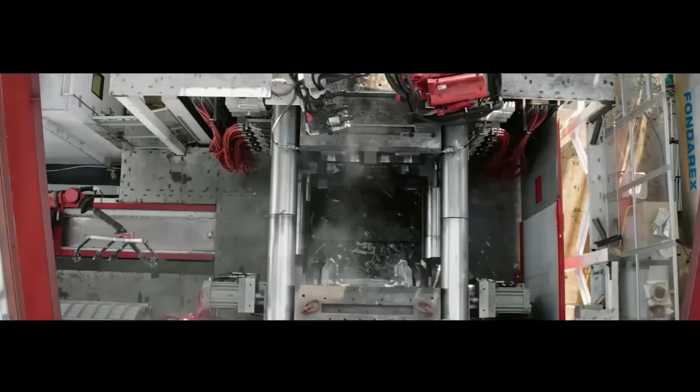This doesn't seem battery related, but in a way it is. There's 3 ways that I see Tesla could increase the output from Fremont. The first is to increase the throughput. The second is to make better use of the floor space through things like the Gigacasting machines. And the third, which is where this ties into batteries, is they could use modular Z construction and build up. The reason why it's battery related is because we've already seen this in the Kato Road facility. Now, I see modular Z construction as less likely, but I thought I would bring it up because it might be of interest to people.

If you'd like to know more about that and Agile at Tesla, there's a great video on this by a guy named Joe Justice, so look that up if you get some time.

Let's move on to Q&A. The first question that's battery related is, when will Cybertruck production begin and at what rate will the ramp happen? And the response was: this year has been a constant struggle with parts supply. If we had 5 extra products, we would not change our vehicle output at all because we're just basically limited by multiple supply chain shortages, not just chips. It really wouldn't matter if we had the Semi or Cybertruck or anything, we wouldn't be able to make it, and the Semi in particular needs a lot of cells. So it needs a lot of cells, a lot of chips.

This year I've received a lot of questions and concerns from people that the 4680 ramp was causing delays in vehicle ramps and the launches of new products. Now, I've consistently said that I don't think that's the case, that the 4680 in some instances might have something to do with it, but it's probably due to other factors and the situation is more complex. And that's basically what Elon is saying here.

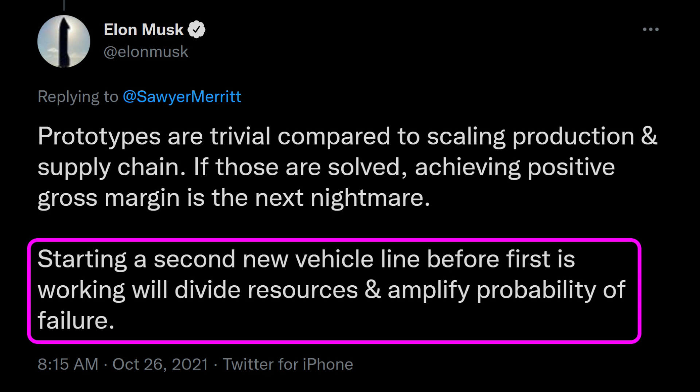I think Tesla's plan was to ramp the Model Y from July to December of this year and then taper the resources over to the Cybertruck as that ramped. But because they don't have enough chips for the Model Y, they've had to delay that. So it makes sense now that the Model Y would ramp from January to June of 2022, and after that they start ramping the Cybertruck and they hit volume production in 2023.

The way things are looking, mid-2022, there should be plenty of chips for all those vehicles. And the 4680 should be ramping in Austin and Berlin in the first half of 2022, on into the second half.

With regards to the Roadster and the Semi, I think there's a much higher likelihood that that's due to delays with the 4680 ramp, because the Semi is so cell hungry, and the Roadster, it's cell hungry as well, and it doesn't require many chips. So to me, it seems like the reason why those are delayed is due to the 4680 ramp issues.

Now, Elon had one more response to the question about when the Cybertruck would begin production, and that was, we should be through our severe supply chain shortages in 2022. I'm optimistic that'll be the case. We will see. I think it's worth emphasizing what's happening here and what Elon's saying.

First, even though a moment ago I just said that the 4680 would most likely cause the delays with Roadster and the Semi, it's not necessarily the case. They still could be having supply chain shortages in other areas.

I'll expand on this a little bit. Vehicles last 10 to 20 years, let's say 15 years on average. Meanwhile, EV manufacturing is growing on an exponential curve. So if we look back 10 to 15 years, if we're recycling the batteries from 10 years ago, from the production from 10 to 15 years ago, then we're only meeting about 10% of our needs for raw materials.

I do totally agree with JB Straubel that we can mine drawers around the country where people have leftover electronics, and we can use that lithium for vehicles. But it's only going to satisfy about, at most, 10% of the demand. So it's going to be probably 2030, 2035 before recycling starts making a significant dent in the raw material needs and drives down prices.

Elon goes on to say, lithium is extremely plentiful. It's one of the most plentiful things on Earth. It's not rare at all. It's hard to avoid lithium. I totally agree with this. People often bring this up to me that, hey, we're going to run out of lithium. And the answer to that specific question is no, of course we're not going to run out of lithium.

But where I think Elon missed an opportunity here is to clarify what the bottleneck for lithium production is. The bottleneck is permitting mines and building all the manufacturing infrastructure around taking that abundant lithium material and turning it into a finished product for vehicles. I think he missed an opportunity to provide a bit of comfort for people like me who are concerned that around 2024, 2025, lithium might start becoming a bottleneck for the production of lithium-ion batteries, because we're just not seeing the upstream material production that's going to be needed to produce all these batteries.

I'm not saying that it's impossible that we'll solve that problem. I'm saying it's not looking promising at the moment, given that the lead times for mining and production is 5 to 8 years, and that's going quickly.

Elon goes on to say lithium is only maybe like 1 to 2% of the battery cell. Again, I agree. It is a minimal component of the battery cell, and the key concern that they would have right now is the cathode, which we'll come to in a second. But if you're missing lithium out of your lithium-ion battery, you can't produce lithium-ion batteries.

It's like Elon has said in the past, you have a vehicle with thousands of parts. If you're missing one part, you can't produce that vehicle. And lithium is more critical to lithium-ion batteries than most components are to a vehicle, because you just can't make the batteries without it. There are no alternatives currently. Sodium-ion might become an alternative, but it's going to be a while before we see that. I don't see that we're going to see high-volume production of sodium-ion batteries this side of 2025.

The next thing Elon says is, the actual thing that matters is the cathode, moving to an iron-based chemistry. I think that the vast majority of batteries in the future will be iron-based. And I totally agree here. The first thing they need to focus on is getting that nickel out of the battery because it's not as abundant as iron. However, soon after that, they may hit bottlenecks with lithium.

And I can see, it kind of feels like Elon is dodging the question here a bit. And I fully understand that because there's no sense spooking the horses about something that won't be occurring for another 4 years. I'm assuming Tesla is in a better position than most companies in the industry, and they may never run into a bottleneck, especially if they start cannibalizing the lithium production of other people. But that comes with a lot of caveats.

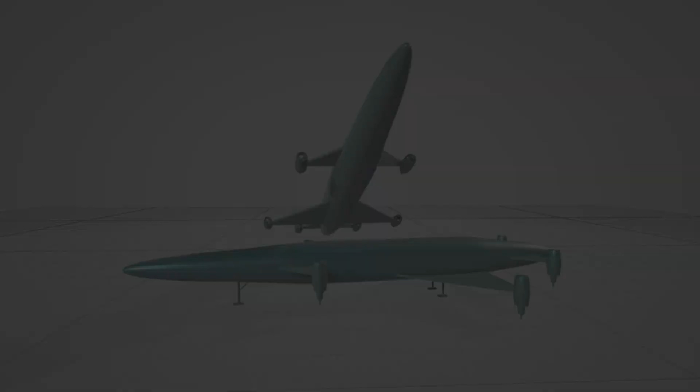His answer was that an important metric is to get the cell energy density around 450 to 500 watt-hours per kilogram, and have a pack efficiency of around 400 watt-hours per kilogram. That's when electric planes start to get interesting.

In the past, Elon has said that about 400 watt-hours per kilogram is required, but I don't know if he specified whether that was at the cell level or at the pack level. I was always suspicious of the 400 watt-hours per kilogram figure because at the cell level, that's not enough. You need about 500 watt-hours per kilogram to make a decent regional jet, even with Tesla's technology. And if you want to make a medium-range jet or a long-range jet, you need more like 700 to 1,000 watt-hours per kilogram.

This does give us sort of a time frame for when we should expect an eSuperVTOL from Tesla. I don't expect us to have long cycle life, high energy density batteries with high power output and high charging speeds until the late 2020s, if not the early 2030s. I've said in the past that I think Tesla should probably start designing an eSuperVTOL around 2025, and then by the time they get through all the regulatory hurdles, it'd maybe be 2032 to 2035 before they could launch one. So keep your ears perked from 2025 onwards. I'd love to be wrong, I'd love them to start it now, but I just don't see that the energy density is there yet.

The last question asked at the annual meeting was, what's the target capacity for the Megapack factory? Elon's response was 40 gigawatt hours. That's a lot more than I was expecting, so much so that I'm going to have to change my forecast. I had predicted that most of Tesla's battery supply would be going into vehicles until the mid-2020s, and then after that, energy storage would take off. But I'm wondering if that's been accelerated now because of the chip shortage.

Vehicles tend to take a lot more chips, so if Tesla doesn't have enough chips to go into vehicles, maybe they can use those chips instead if they have a fewer number to produce energy storage products. Now, I don't know if this is the case. This could have always been the plan, but it seems interesting to me, or coincidental, that at the time when they're running short on chips and have a whole lot of battery cell supply coming online, they might have to divert those cells to energy storage products instead.

A number of people have asked me what type of battery cells I expect them to use for those 40 gigawatt hours. My first guess would be CATL LFP batteries. Tesla's also shifting their line of standard range vehicles over to LFP, which will free up a lot of nickel, but I would think it would make a lot more sense for those 2170 cells to be used in vehicles and Powerwalls, and to use LFP batteries for the Megapacks. But again, this is all speculation on my part.

That wraps up all the comments Elon made at the annual meeting that were battery related. And with that, let's move on to Giga Berlin. There was one comment made in his speech that we need to cover, and then there's a whole lot we have to cover in the walkthrough.

With that out of the way, let's get into the walkthrough. I want to start by thanking the Tesla Check YouTube channel for providing these crisp 6K images that we can zoom in on. Thanks, Andrew, much appreciated. Another note before we get into this, a lot of people assume that what we see here is what Giga Berlin will actually be producing or using in their vehicle lines.

That's not necessarily the case.

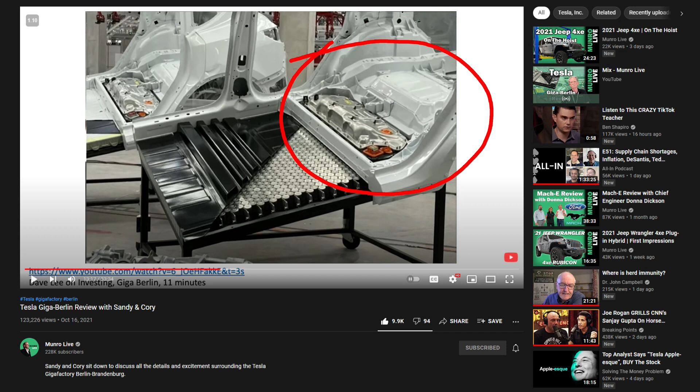These are displays. Starting with the 2170 battery pack, Munro & Associates confirmed the vehicle structure we see here is an early version of the Model Y, and it's likely not representative of what will be coming out of Giga Berlin. This means it would have come from Fremont.

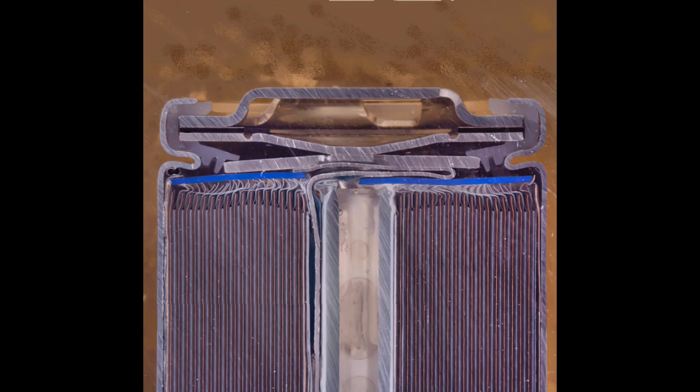As for the 4680 battery pack, it's clearly incomplete. When we zoom into the front, we can clearly see that the battery cells are using some type of facade. Battery cells are wound, which creates a layered effect when you slice through them, and I've seen this done many times before. I wouldn't recommend doing this at home - you could have the battery explode in your face.

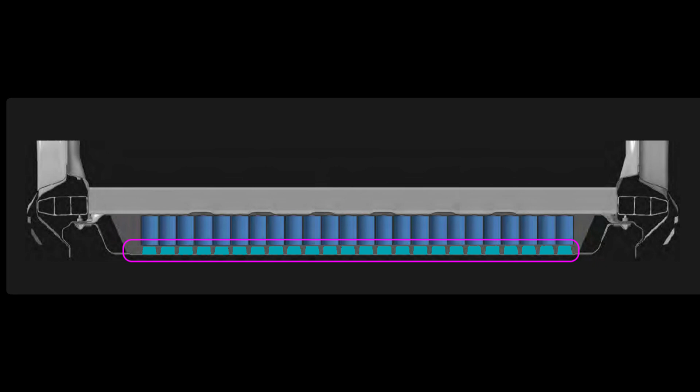From there, it looks like the battery cells are floating in space - no wires, no connections, no supports. As we can see in the image from Battery Day, there appears to be what looks like cooling channels below the battery cells. Whether that's actually what they are remains to be seen, but I don't think we can reliably tell from this image.

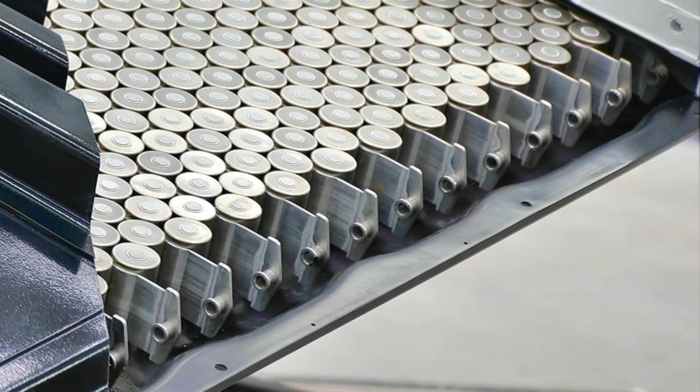Then, if we look along the side, there's no circuitry or wiring. We do see what appears to be cooling ribbons like those that are used in Tesla's other vehicles. However, this doesn't yet confirm whether Tesla is using plate or ribbon cooling for the pack.

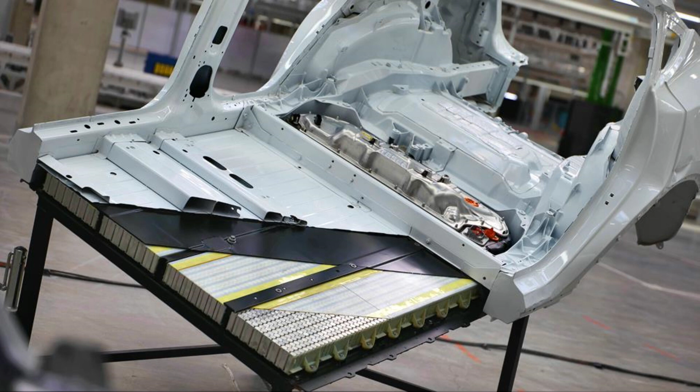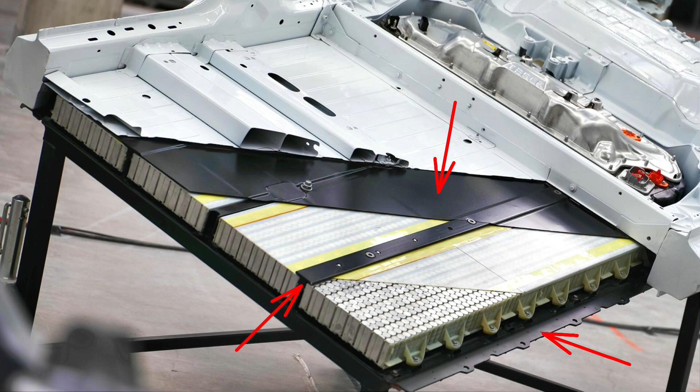With all that said, these images do tell us something important - something that I've been saying and Munro & Associates has also been saying. The 2170 battery pack has unnecessary redundancy. You have the steel case of the battery pack, which is rigid and can serve as structure to keep the battery from twisting, and also a structural floor pan that does exactly the same thing.

In the 4680 battery pack, the pack itself serves as the structural floor pan, and it's only one layer of metal. For me, there doesn't appear to be a reason why this can't be done with the 2170 battery pack as well. The 4680 uses cells for rigidity, and the 2170 battery pack uses steel beams.

For me, what this all means is that the door may still be open for Tesla to use the 2170 battery pack as a structural component. It would just be heavier than the 4680 battery pack because it would still be using steel beams.

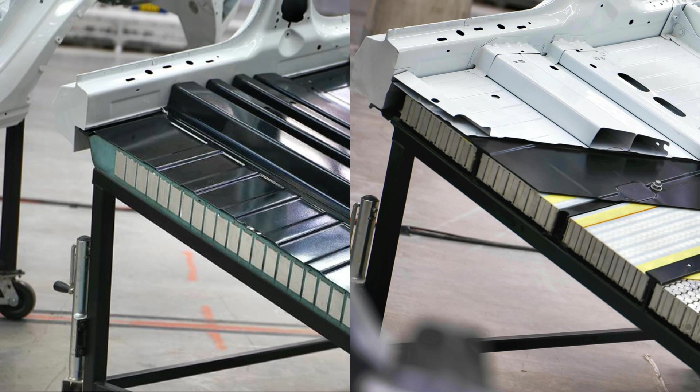If that's the case, the 2170 and 4680 battery packs could be made interchangeable at the Berlin factory. My gut feel is that they're not going to do this because it would require redesign and would be temporary until Berlin starts using the 4680.

But I think it's important to cover it because it provides a better understanding of how the structural battery pack works. That is, it not only removes duplication in the underbody of the vehicle with the structural floor pan, it replaces the steel beams with batteries, which makes the pack lighter weight, more rigid, and increases capacity.

Next, let's cover off the 12-kilometer roll of anode material they had on display. A lot of people ask me if this came from Panasonic at Giga Nevada or Tesla at Kato Road. My view is it most likely came from Kato Road because in the Q2 earnings call, Tesla advised that they were having issues with the cathode side, but not the anode side of the production process. So you may as well grab the material from the side that can actually produce that anode roll.

There's also another thing to take into account, which is that Panasonic at Giga Nevada and Tesla, even though they're in the same building, there's a strong partition between them. A lot of people think it's this open organic relationship. There is a lot of communication between the two parties, but everything that Panasonic does is behind closed doors because it's trade secret information as to how they run their lines.

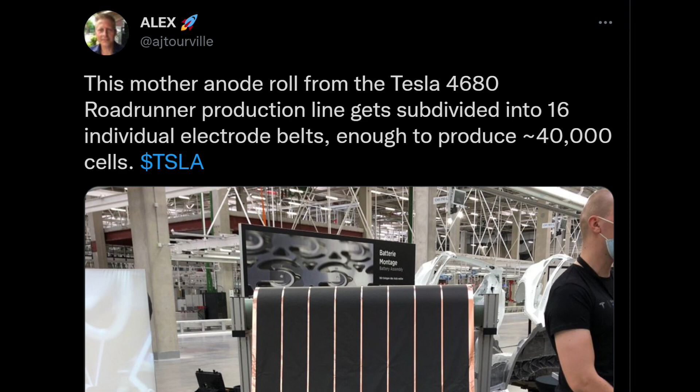Let's move on to this image, which shows cell wiring.

This is another great image from the Tesla Check YouTube channel. All the other images I saw online were kind of blurry, and this gives us a really high definition look at what's going on here.

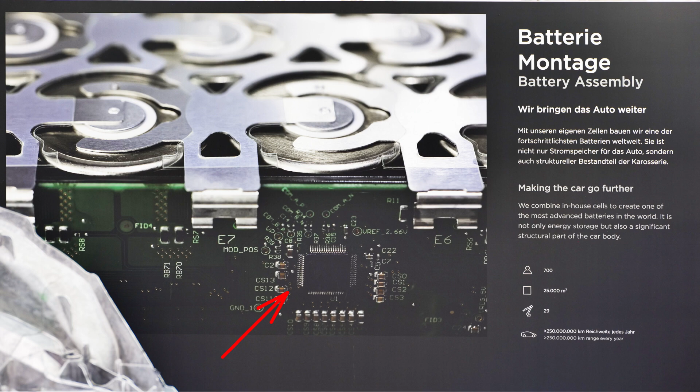There were three options I showed in previous videos for the wiring at the top of the battery cells: a gasket, a printed circuit board, and plain metal connectors. It looks like Tesla has chosen the plain metal connectors. Along the side, you can see the circuit board, but this isn't new - it's similar to what's used in other Tesla vehicles.

That wraps up the Giga Berlin tour. Let's move on to the tabless cell leak.

When I say the tabless cell leak, I'm referring to these hubcap looking devices that sit on the top and bottom of the battery cell before it's inserted into the battery cell casing. In this video, I'm just going to focus on what the purpose of this hubcap looking device is. If you want to know more about how the battery cell comes together, you can refer to that video I've linked in the description, which is also from the official XPod podcast.

I've thought quite a bit about what this could actually be for, and it's mostly left me stumped. There's a couple things that are obvious: first off, it's for electrical connectivity because it's copper and metal, and it attaches to the electrodes on the top and bottom of the battery cell. It probably also serves a function for manufacturing - again, that's in the video linked in the description.

However, beyond that, they could have solved those problems in a number of ways. Why did they choose this design? To answer this question, the first thing I think to do is ask myself what's different about the 4680 battery cell. Why would it require this metal sheet at the top and bottom of the battery cell?

The first two things that come to mind are the fact that the battery cell is larger - the 4680 design versus the 2170 - and the second thing is the tabless electrode at the top and bottom of the battery cell. Before we move on, it's worth pointing out that by tabless electrode, they mean these thousands of tabs that you see at the top and bottom of the battery cell. We're going to refer to those as flags rather than tabs.

Starting with the larger cell size, I don't think that's directly related here. I don't think that's the reason why you need these sheets of metal on the top and bottom. The larger cell size only comes into play because as you increase the size of the battery cell, you need more heat dissipation, and that necessitates the use of the tabless electrode. So for me, the tabless electrode is the main difference between this battery cell and other battery cells.

Well, why would a tabless electrode - those thousands of flags at the top - why would that need a piece of metal at the top and bottom? My view is that the tabless electrode, those flags, are kind of like the hairs on your head. And if you have those pressed up against the top of the battery cell, it's going to disturb those as the battery is vibrated. Those foils are only about 10 microns thick, which is about the diameter of a red blood cell. So these are very sensitive to any sort of friction.

I think what those metal sheets do at the top and bottom is it's almost like a helmet. It compresses the hair down, and instead of rubbing somebody's hair, you get the helmet instead. Put another way, if you have these metal sheets on the top and bottom, it acts as a proxy or a barrier that protects the tabless foils or flags at the top and bottom. I hope that makes sense.

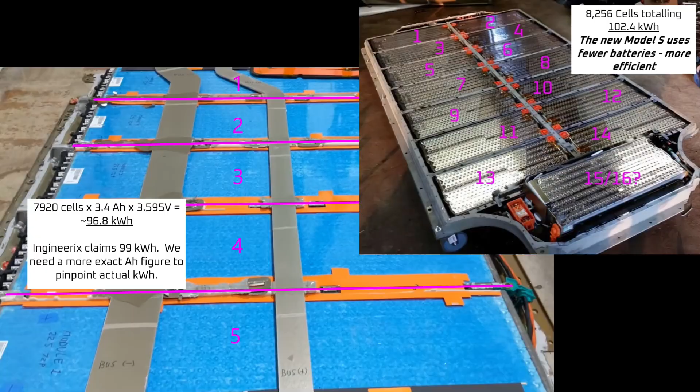If you're familiar with what the old Model S pack looked like, the improvements are obvious just from a first glance. This pack uses 5 modules instead of 16. That'll make the pack lighter, easier to manufacture, and more energy dense.

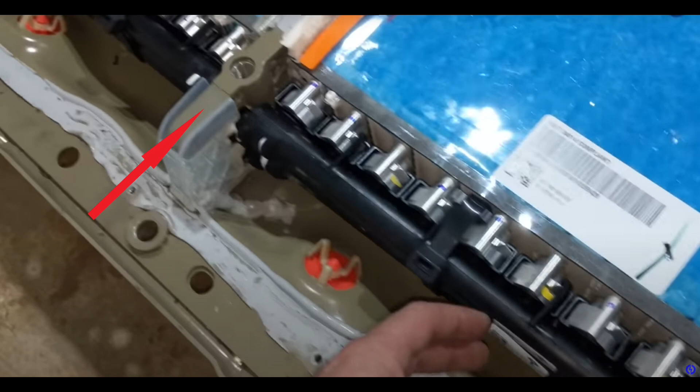Now, I'm assuming that under each of the orange covers is a steel beam. The side shots appear to be showing those beams sticking out along the sides. What this means is that the battery cell isn't being used as a structural member within the battery. However, the pack still has rigid structure that Tesla might be able to take advantage of. For instance, they might be able to remove the structural floor pan and just use the battery pack itself as the structural floor pan. As I pointed out, and Sandy Munro has pointed out, it's just redundant having both the battery pack and the structural floor pan underneath the vehicle.

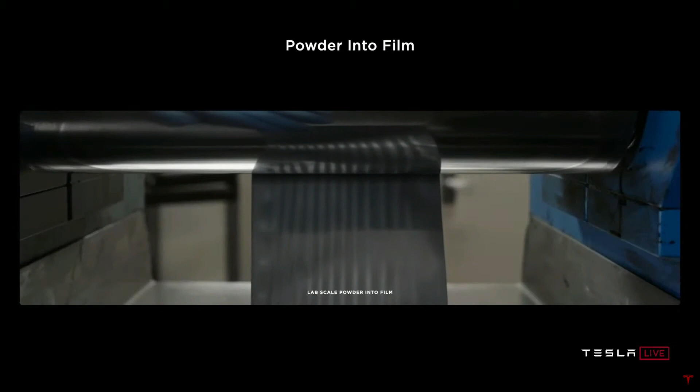One is from Galileo Russell, that instead of creating a wider roller, they just used smaller sets of rollers to avoid the dimpling and denting issues with the compression of the cathode material.

The other one I think is from Alex Torville, and he's saying no, they're going to stick with the big rollers, but what they're going to do is make that material a little bit hotter, a little bit warmer, so it rolls more easily.

I think both of those are feasible. I don't particularly care which route they take, so long as they hit the targets they need to hit. Both sound perfectly feasible to me, and it could actually be a combination of the two. We may never know for sure, but what I believe is the case, based on everything I'm hearing, is that they're ready to go, and that's the important thing.

Now, Drew goes on to say, this is a new architecture, and unknown unknowns may still exist. Our top priority is ensuring top quality in what we deliver. So he's saying, hey, if we see a green field ahead of us that we can gallop away into, and we can't see anything that's going to hold us back.

But as is the case with manufacturing, you almost always run into some sort of issue. Things are looking pretty damn good as far as I can tell.

He also says, from a cell perspective, we are comfortable with the design maturity and manufacturing readiness matching the pack timeline I just mentioned. In other words, we're happy with cells, but it's that pack that we're tacking everything to.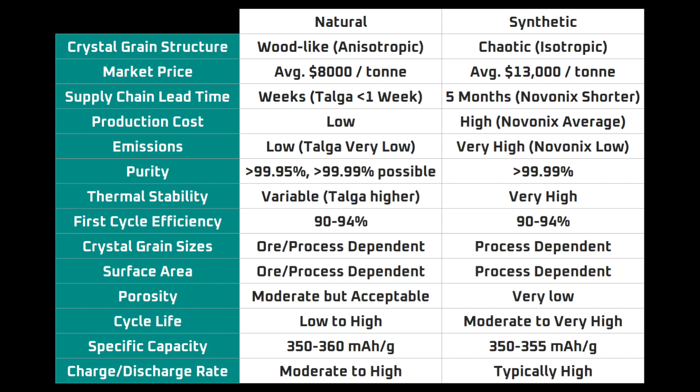And to a certain extent, that's true. It depends if you're talking about synthetic graphite or natural graphite. Synthetic graphite is generally made from fossil fuel products like oil and coal. The graphite used for battery cells that's natural is a more specialized product, and you need mining permits, etc., so there can be bottlenecks there. I think most companies would prefer to use more natural graphite because it's cleaner and greener, but if you don't have that, synthetic is always there. And China has just announced at least 200 gigawatt hours of anode production by 2025. So I think we're good on anode as well.

He goes on to say, there isn't exactly tit for tat - get better anode, use less cathode. There's a fundamental ratio you need to maintain for the cell to function. Now what he's talking about here is the ratio of energy that each side can store. So if you have the cathode that can store 1, and you want the anode to store 1, if you increase the energy density of the anode material, that shrinks the anode. But the cathode, if you keep the energy density of that the same, then you use the same amount of cathode. So increasing the energy density of the anode just shrinks it, and the cathode stays the same because they have to have a roughly equal ratio for that to work.

The primary focus on the anode side is ensuring we're able to continue to reduce the cost of the anode without impeding on the long-term cyclability of the product. This is what I've been pounding the table on for at least 6-9 months now about the silicon that Tesla is using in their battery. The longevity of that silicon will determine which products they end up using it in. If it doesn't have really good long-term cyclability, they might not use it in LFP. This will be covered in a future video on Tesla LFP, where I talk about what implications silicon could have if it has long cycle life on a Tesla battery cell, and even if it doesn't have long cycle life, even if it's decent, what impacts that'll have.